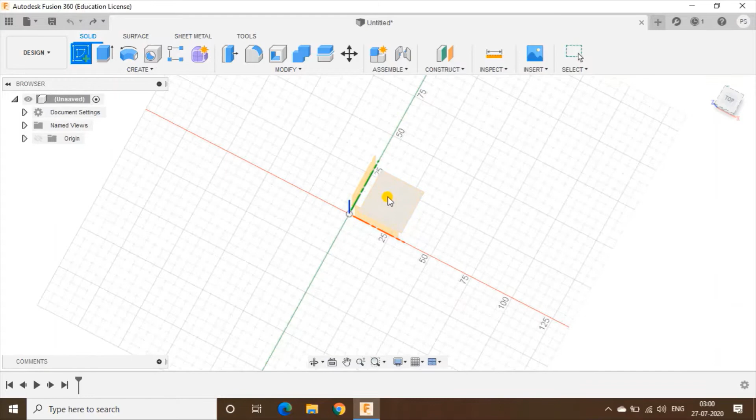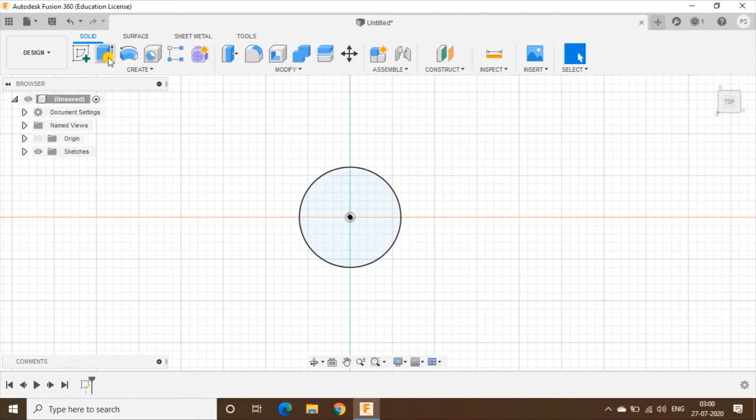Go to create sketch and select the plane. First we have to make the bolt, so we are making an M12 bolt. Select the circle and give 12 mm diameter to this circle. Finish the sketch, and now extrude up to 60 mm. This is the length of this bolt.

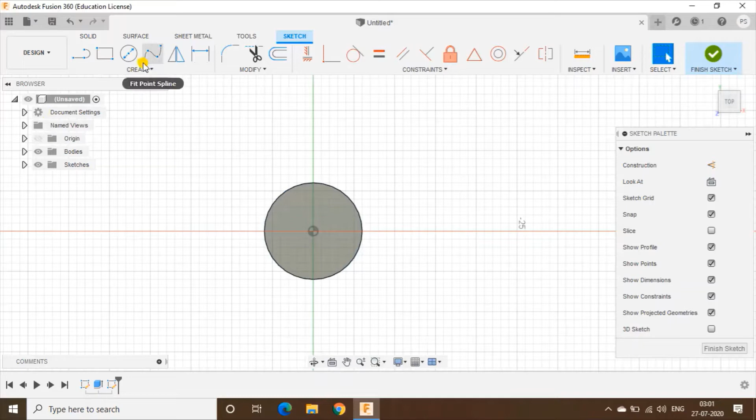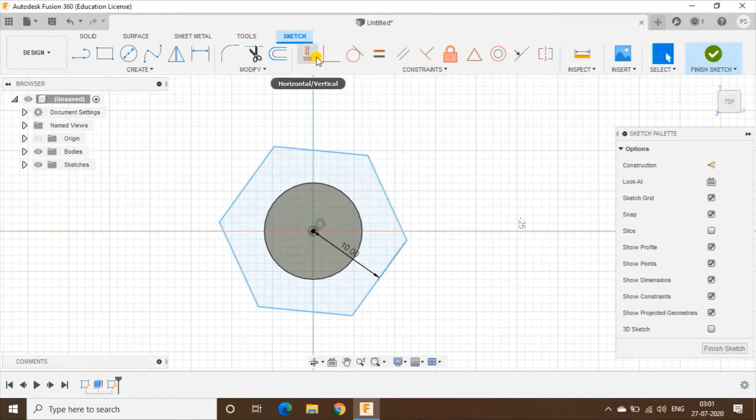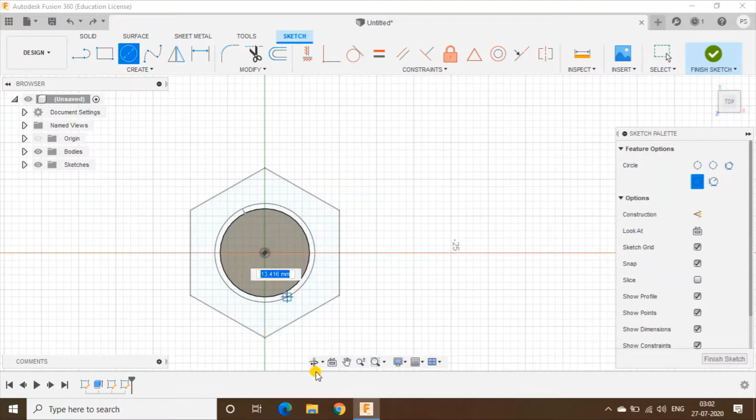Now the next step is the head of the bolt. Go again to create sketch and choose the polygon. Give a 10 mm radius to this polygon. Now we will make the constraint and select the point of the bolt, then we have to make a circle up to the corner of the polygon. Now finish the sketch.

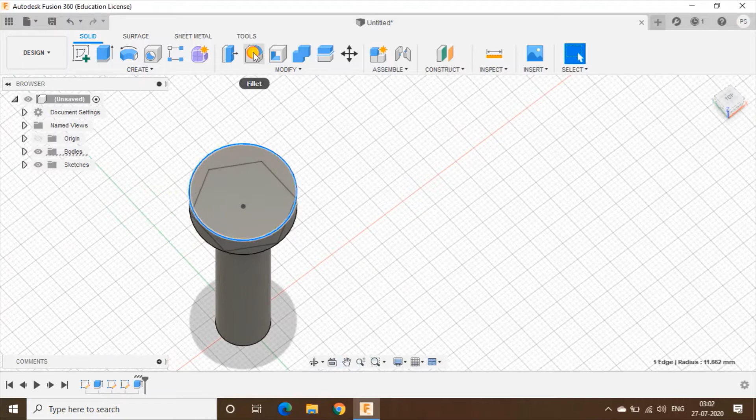Now extrude the circle up to 7.5 mm and do a fillet on the upper edge of this circle, 2 mm radius. Now we have to extrude the polygon, but we will make it a new body.

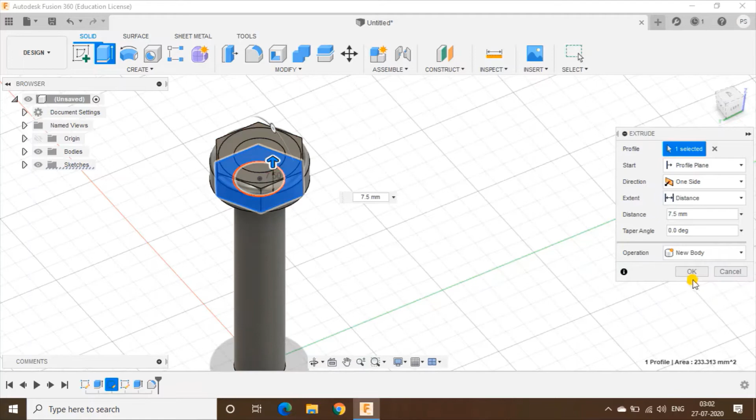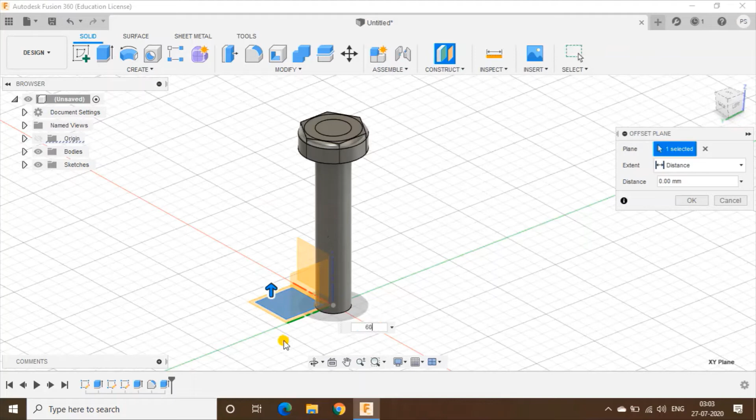Now we will separate these two bodies from the lower part of the bolt. Go to construct and take an offset up to 60 mm. Select the plane and give 60 mm height, and OK. Now go to split body, select the body and select the splitting tool, that is the plane. OK, it's split now.

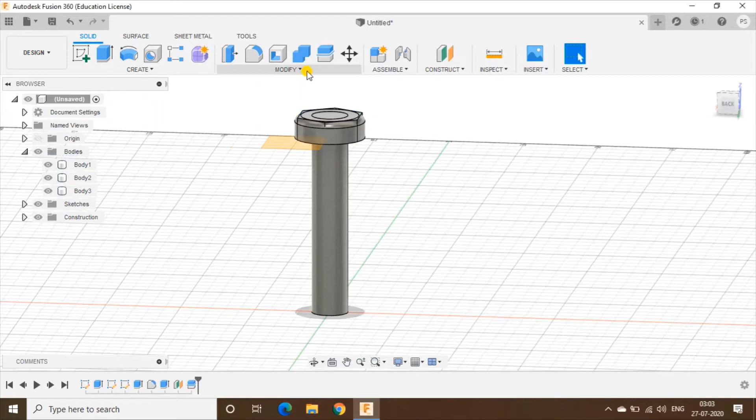Now what we'll do is combine body 2 and body 3. We have to combine both these bodies, but choose intersect, so the remaining common part will be shown. And now extrude this.

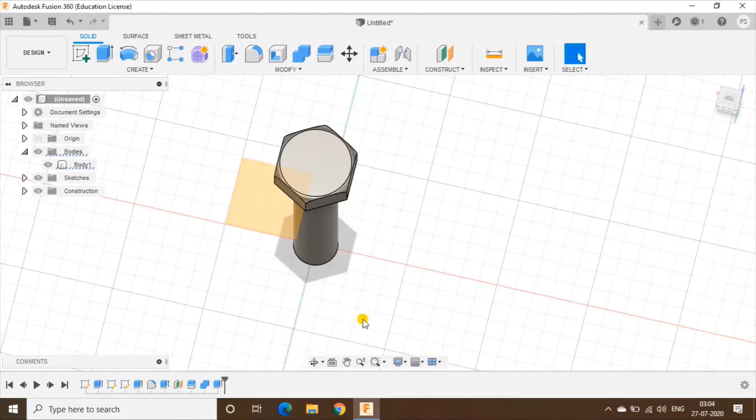0.5, okay. So the next step is thread. We have to give the thread to our bolt. Go to create and choose thread.

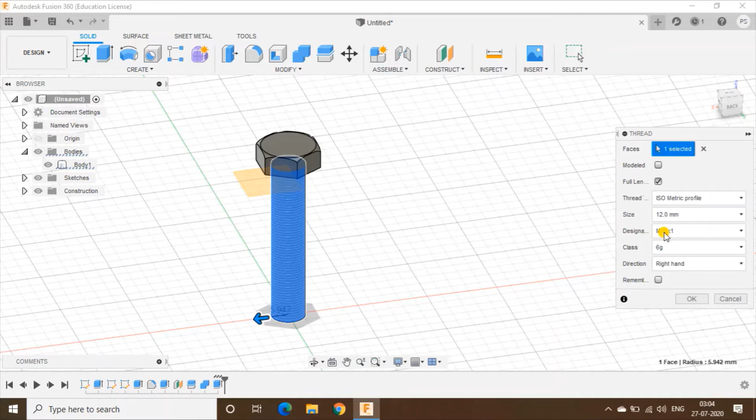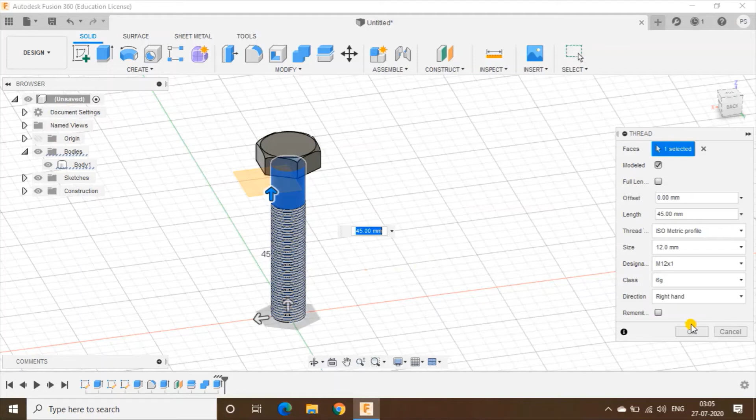So we have to make a collar nut. I will select the designation for the threads, that is M12, one is pitch and modeled. I have to select some length, that is 45 mm for our threads of the bolt. 45 mm, okay, it's okay. Now you can see this, it's looking like this.

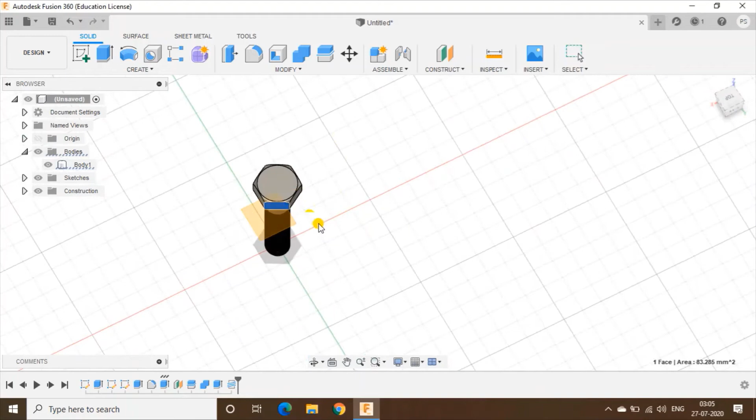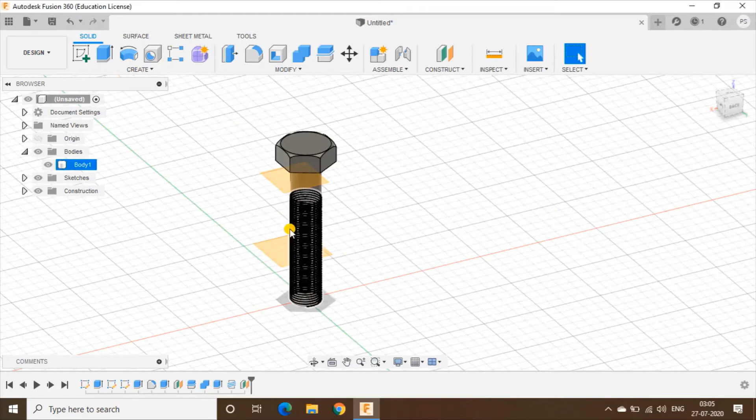Now again, the next step is our nut. For the nut we have to take an offset. Go to construct and choose offset, and give it 30 mm height, and now select this plane and go to create a sketch.

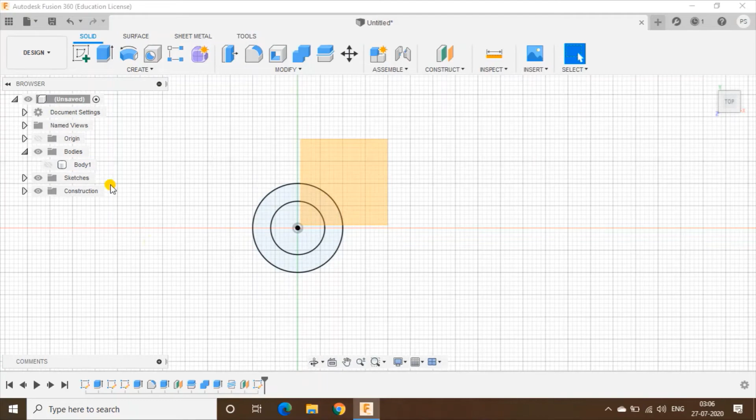Similarly, make a 20 mm circle, and the inner circle is 12 mm for our bolt, and finish, and hide this body, and do the extrude to our sketch. I will give 10 mm height of the nut.

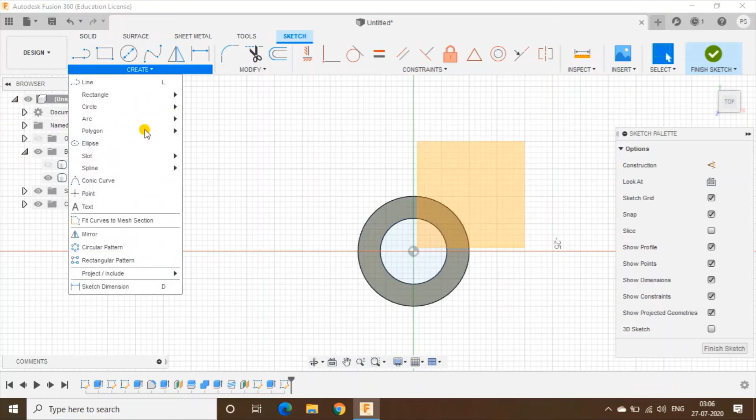Now again go to the sketch and give the polygon shape by choosing the polygon, a circumscribed polygon. Now I will give the 10 mm radius to our polygon.

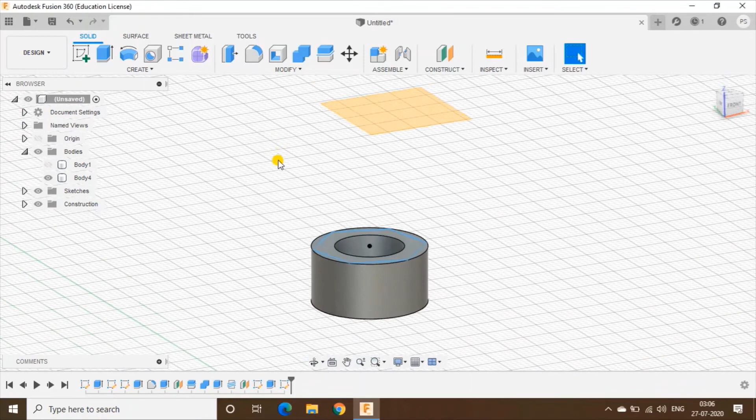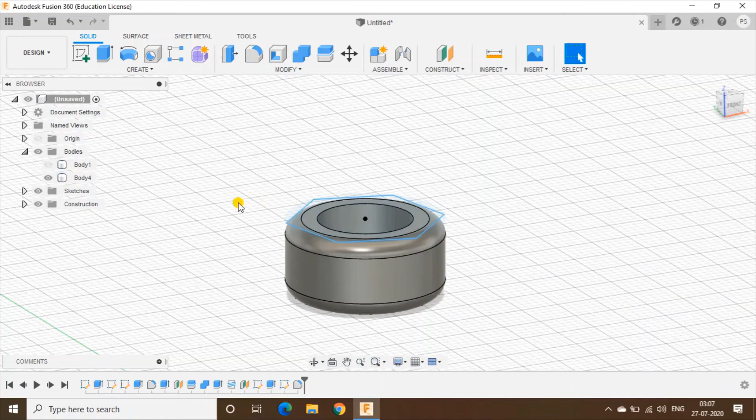Okay, now what we have to do is fillet both sides of our nut, 2 mm radius. Okay, so again we will extrude our polygon up to 10 mm minus 10 mm and do the intersect. Okay, so it's looking nice.

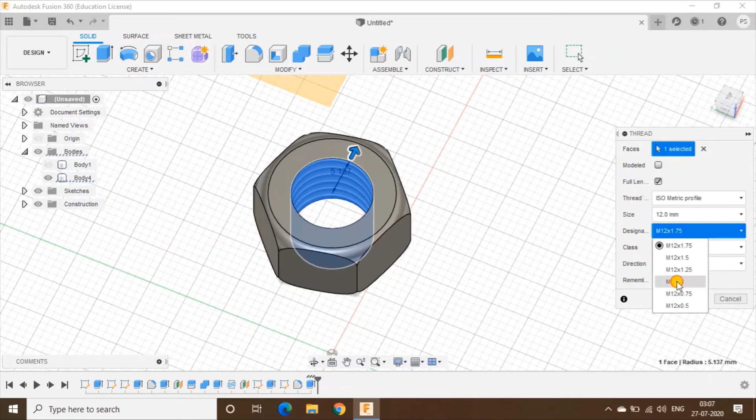So what is remaining? Thread is remaining. Give it the same thread. Yes, modeled. Click on modeled and okay. So it's looking like this.

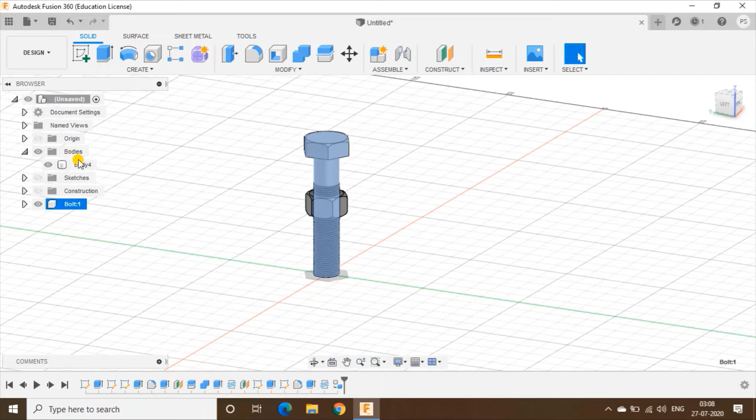Now see both the combination of nut and bolt. Hide the construct and sketch. Now we will create component from the body and rename it bolt, B-O-L-T. Next, same for this, same for nut. Right click and go to create component from the body and rename it nut. So it is over now.

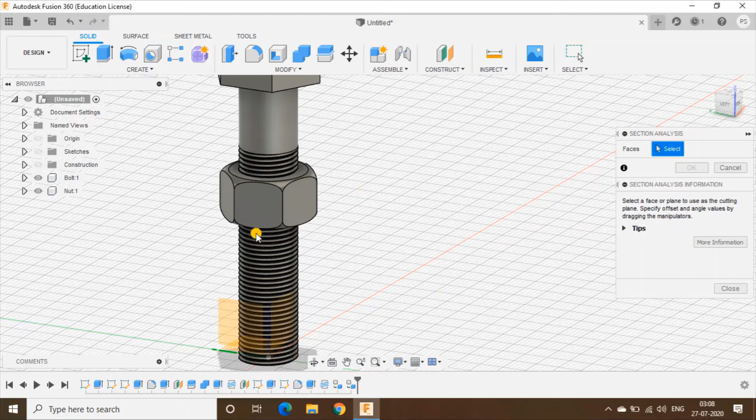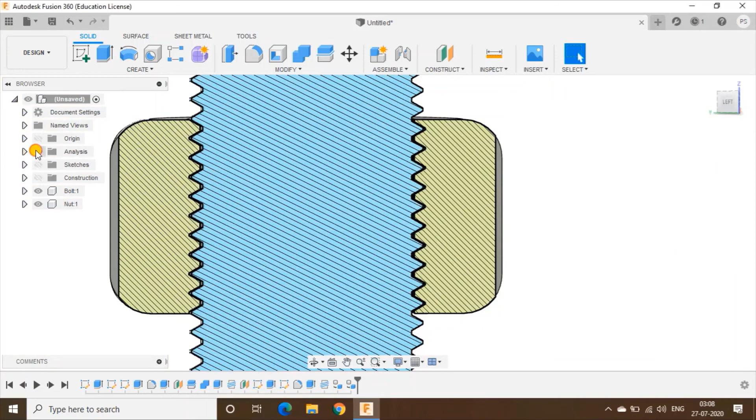So what we have to do is see the section analysis of our nut and bolt, so we can see the exact fitting of this nut and bolt through this feature. You can see this is a very fine and good meshing of our nut and bolt with each other. Now hide the analyze, and this is our final design. We have completed our design.